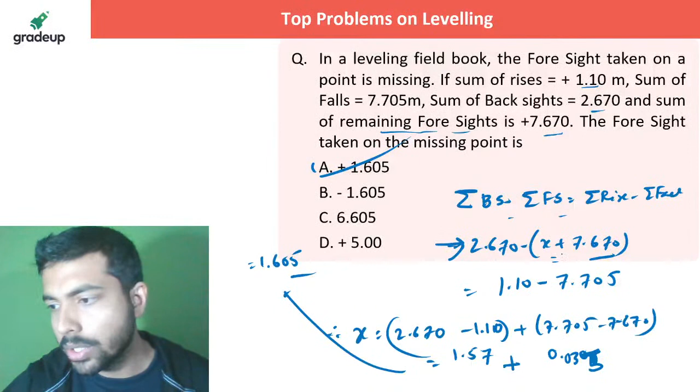It's not 0.95. It's going to be 0.035: 7.705 minus 7.670. So it's 1.57 plus 0.035, that is 1.605, the first answer. The concept is very simple. Summation backsight minus summation foresight is summation rise minus summation fall. They are saying one of the foresight readings was missing. What is that missing foresight reading? The remaining sum is 7.67, and one more is there, that is X. Let me know in the chat section. So what is the answer to this question?

An observer standing on the deck of a ship just sees the top of a lighthouse which is 40 meters above the sea level. If the height of the observer is 8 meters above the sea level, find the distance of the observer from the lighthouse in kilometers. It's a very simple question, a one mark problem. I hope everyone can do it. Quickly, let me know in the chat section what the answer is.

An observer standing on the deck of a ship just sees the top of a lighthouse which is 40 meters above the sea level. If the height of the observer is 8 meters above the sea level, find the distance. So everybody knows the actual concept. D1 is root over H1 by 0.0673, where D is in kilometers and H1 is in meters. And D2 is root over H2 by 0.0673. Many people will ask me why and how. The point is very simple.

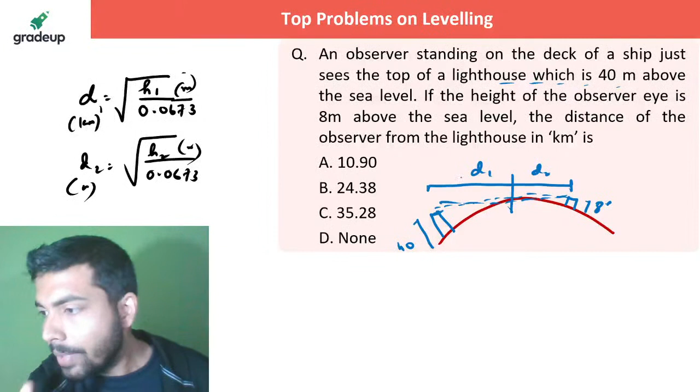The lighthouse is 40 meters above the sea level. This is the lighthouse, and the height of the observer is only 8 meters. So this is 8 meters and this is 40 meters. What is the total distance between them? That is what they are asking. This is D1, this is D2, and their sum, D1 plus D2, is the total distance between them.

If you calculate it properly, it gives a value of 3.855, if I'm not wrong, times root over H1 plus root over H2. Check once whether you are getting this value or not. 3.855, yes, and this is in kilometers. So just put the values here. It's 3.855 times root over H1, where H1 is the height of the lighthouse, 40, plus root over of 8 meters.

3.855 times root over 40 plus root over 8. So it is coming to 35 point something. One is 40 meters above, one is 8 meters above. What should the distance between them be? What do you think the distance will be? Check it and let me know in the chat section. It's coming to around 35.28, I think. Let me calculate it once. Yes, it's 35.28 kilometers. So the nearest option is C. The correct option is C. So be careful with your calculations, everybody.

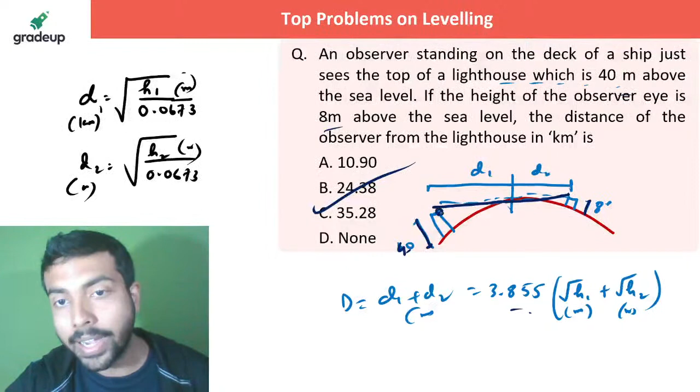An observer is standing here, and his eye level is at a height of 8 meters, and the lighthouse is at a height of 40 meters. So what should the distance between them be so that only the tip of the lighthouse is observed? It's D1 plus D2.

Next question is on your screen. This is also a very small question. I just want to touch upon all the topics of leveling, which is one of the most important topics in surveying. The following readings refer to an operation of reciprocal leveling. Stations and staff readings are both given. The difference in elevation between A and B is? It's a very simple question, I hope everybody can do it. Please let me know in the chat section what the answer is.

Right. So Krishna is answering which option? This one, C, or the other question? What are you talking about over here? This question, C. Okay, Gopal is also saying C. I think both of you are talking about this question.

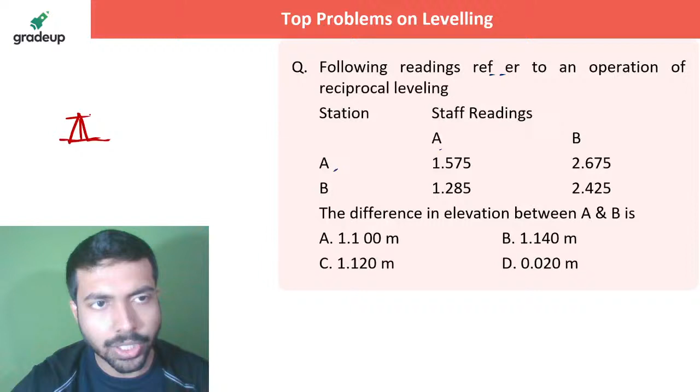So everybody knows, I think, the concept of difference in elevation between the 2 points. So reciprocal leveling, everybody knows. So this is, for example, a particular station. Near it, I am doing it. First of all, this is say another point, any particular point, I don't know about that point. So they are saying at A they are getting this, and at B they are getting this much. So it's 2.675, 1.575, right? Now in the first set of observations,

it's delta H. So from here delta H is 2.675 plus correction. Why? Because this reading is erroneous.

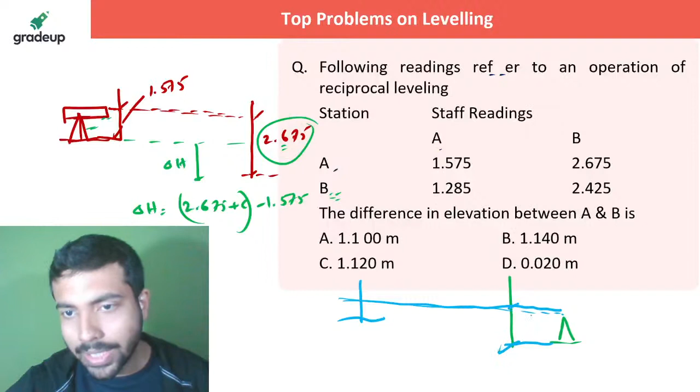So what happens in the other observations? Let's see that also. So this particular thing is happening. This reading is 2.425 and this reading is 1.285. Understand the concept, it will clear many doubts. Don't just go by the formula. Suppose I'm giving you an additional question: if RL of A is 200 meter, what is the RL of B? If you don't know which one is at a higher elevation, you can't do it. That's why always try to know the concept behind it.

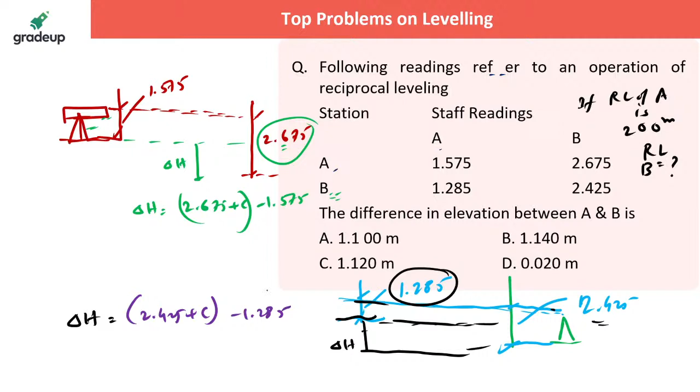Everybody knows the formula delta H is equal to half of the difference in the readings. But this is the concept: both are having a difference of delta H. So the true elevation difference delta H is equal to this erroneous reading 1.285 plus C. This reading is taken near and this reading is taken far. So it's 2.425 plus C minus 1.285. Sorry, it's not plus C there; here it will be plus C. Now you have two equations. Delta H is equal to 2.675 ... This is the combined correction due to curvature, refraction, and collimation error. Everything is included, right?

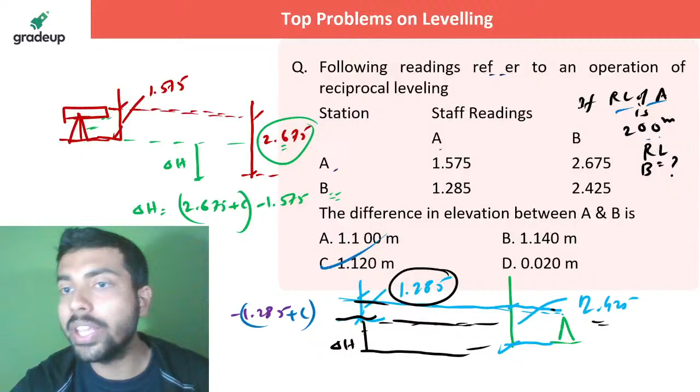But if they ask if RL of A is 200 meter, what is the RL of B? The answer can be 200 plus 1.12, or 200 minus 1.12. That is why you have to draw the figure. You have to at least know from the readings which station is above which. If RL of A is 200 meters, you see that A is above B, so RL of B must be lower. 200 minus 1.12 is 198.88 meter.

So the next question is up on your screen.

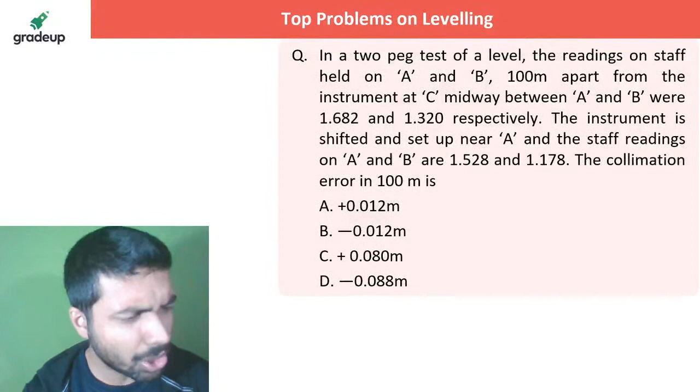In this particular question, they're asking: in a two peg test of a level, the readings on a staff held on A and B, 100 meter apart, from the instrument at C midway between A and B were 1.682 and 1.320 respectively. In a two peg, peg doesn't mean the peg you're thinking of, okay? So let me know in the chat section. What is the answer to this question? Very simple question. Once again, I hope everybody can do it.

The reading on a staff held on A and B 100 meter apart from the instrument at C midway between A and B were 1.682 and 1.320 respectively. The instrument is shifted and set up near A and the staff readings on A and B are 1.528 and 1.178 respectively. Fine. What is the collimation error in 100 meter? Quickly let me know in the chat section. Quick, as fast as possible. Collimation error is asked in 100 meter.

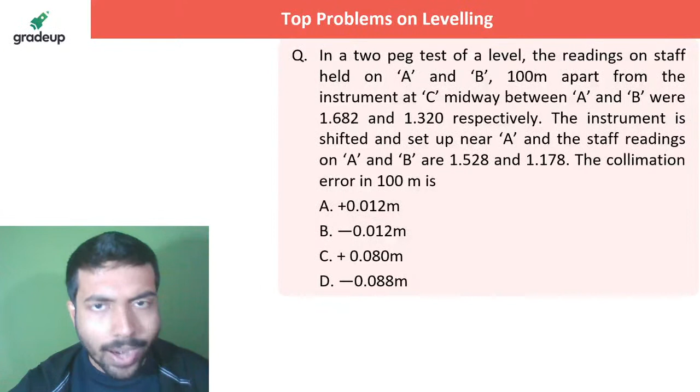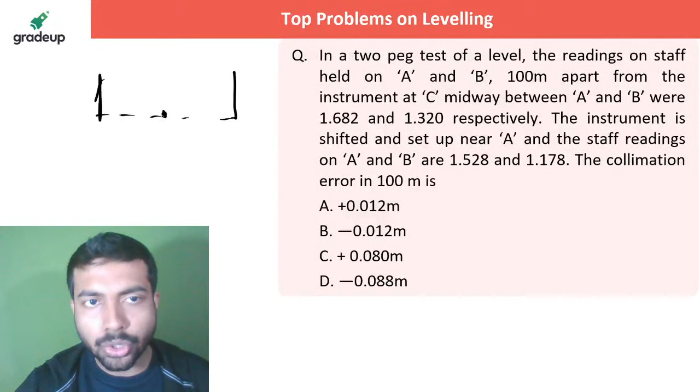Quickly. Come on, what are you doing? Quickly let me know in the chat section. What is the answer to this collimation error? How do we find collimation error, sir? Everybody knows it, yes or no? Yes sir. So what they are saying, initially two stations were there, A and B, 100 meter apart. Instrument at C midway between A and B. The instrument is here, right? So when the instrument is midway, what is the collimation error? Zero, sir.

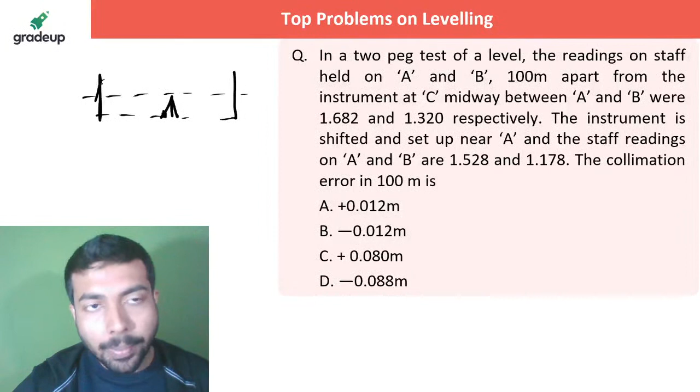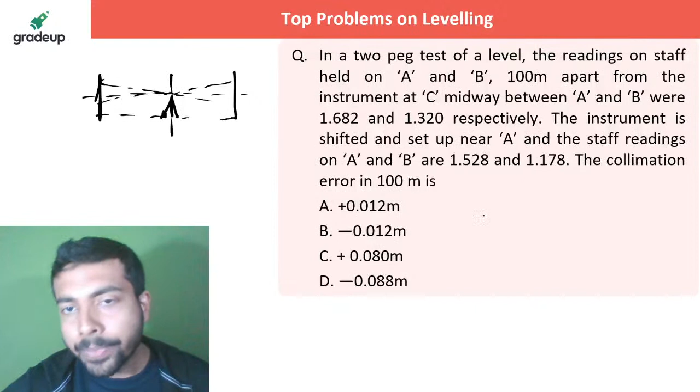When the instrument is midway between A and B, whatever collimation error happened due to A, the same collimation error happened in case of B also. I shouldn't say zero, they're equal. What is the meaning of collimation error? Collimation error means, for example, an instrument is there and its horizontal axis is not horizontal. That means the axis is going to lean downwards. You should get this value as the reading, but instead you are getting this value. This is known as collimation error.

So basically you were about to get these values as reading, and what are you getting? Negative. So in this occasion, both the collimation errors are going to be same. Krishna is saying option A. I hope he is correct. Now the instrument is shifted and set up near A. This is A, this is B. The staff readings were 1.682, so the actual reading should have been 1.682 plus C. And here it should have been 1.320 plus C. That's how it should have been, right?

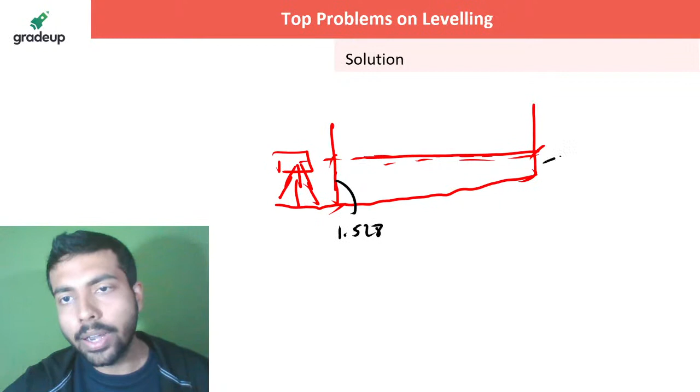The instrument shifted and set up near A. Now it has shifted near to A, and I'm getting readings of 1.528 and 1.178. So in this occasion, tell me what is the collimation error going to be? How much collimation error will there be here? Anybody in the live chat section? But error is coming 0.006.

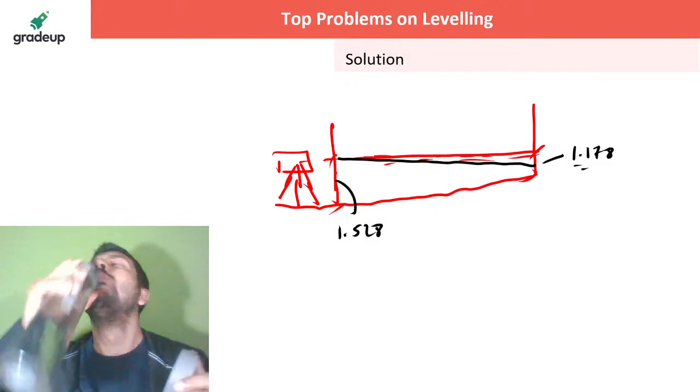Wait, wait. Understand one point. I can see many people are just escaping from the session. Oh, the problem is tough. That is a common thing that you do, without understanding a single word. Just be focused. Every problem is not just formula based.

So here, what will be the collimation error? That will be 2C. Why? Because if in the first case the collimation error is C, in this case it is going to be 2C. When the instrument was at the midpoint, the collimation error was coming due to 50 meter, 50 meter. Now the collimation error is coming due to 100 meter. So of course the error is going to be 2C.

It's as simple as that, right? Suppose I am saying that this is theta. Okay, this is the collimation error. This is say L. What is this value? आप क्या बोलोगे? This is L tan theta. tan theta is equal to x by L, so x is equal to L tan theta.

Fine. Now suppose I'm increasing the distance to 2L. Now on that occasion, what will be this value? It's 2L tan theta. Simple सी बात है. Right? So the error is going to be double in this case.

Understanding the concept, please let me know in the chat section. सबको समझ में आ रहा है हाँ या ना quickly बोलोगे एक बार. Let me know in the chat section whether you people are getting it, yes or no.

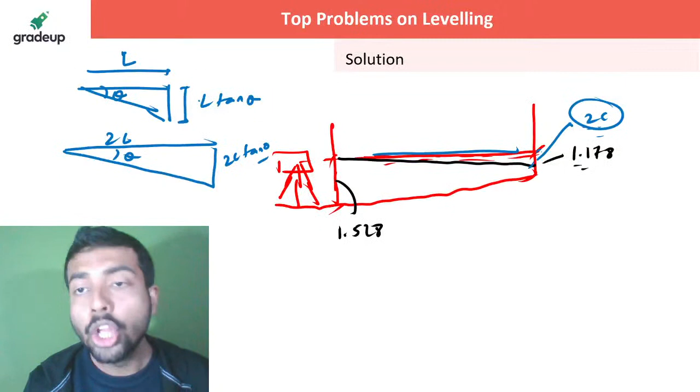Clear? So how do you actually find it? I am just letting you know a particular formula. So it's collimation error. Whatever you are going to get, that is your half of simply 1.528 minus 1.178, 1.682. Yes, sir, 0.006 is coming. Yeah, you have to do the double of that. 1.682 minus 1...

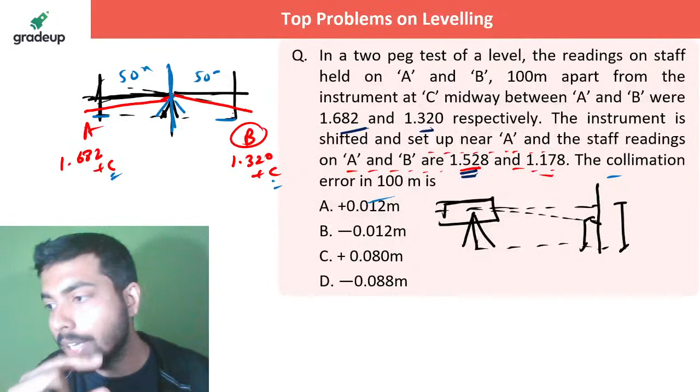What is coming over here is that they are asking what the collimation error means. Actually the 2C case they are asking in this occasion. So collimation error: if I ask what is the true difference of height between A and B, you will tell me 1.682 plus C minus 1.320 plus C. Fine, this is the actual height difference.

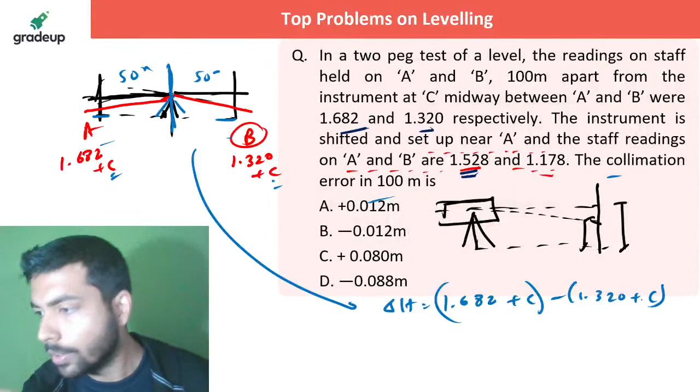Okay, in this occasion, what is the difference in height? It is 1.528 minus 1.178 plus 2C. Now both are equal. Height का जो difference है वो दोनों ही बराबर है एक दूसरे का. So from here, it's very simple.

Understand. Delta H is the difference in height between the two levels A and B. These are the same. Wherever you place the instrument doesn't matter. The difference between A and B is going to be the same. Either you keep it midway or near A and measure near B, doesn't matter at all, right?

So this delta H you are equating to 1.682 minus 1.320 plus C, and that is also the same as 1.528 minus 1.178 plus 2C. So what is the answer? C is half of 1.682 minus 1.320 minus 1.528 minus 1.178. I hope everybody is understanding the question. Please let me know in the chat section what value is coming.

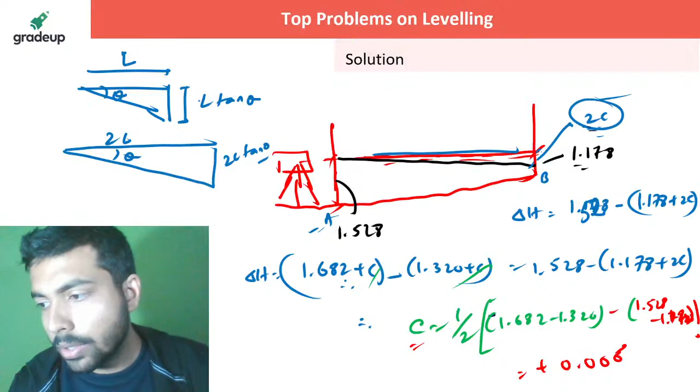1.682 minus 1.32, minus 1.528 minus 1.178, right? The answer is coming 0.012 by 2, so you are saying it's 0.006. The answer is coming as 0.006. Fine, not a big deal. Yes, okay. So it's 0.006 meter.

Now you will ask me, sir, is the answer 0.006 meter? But they are asking the collimation error in 100 meter. You are finding C. C is the collimation error in 50 meter, not in 100 meter. 2C is the collimation error in 100 meter, and that's why the answer is 0.006 into 2, that is 0.012 meter, and option A is correct. Understanding what I'm trying to say? समझ में आ रहा है मैं क्या बोलने की कोशिश कर रहा हूँ?

They are asking the collimation error in 100 meter. That means they are asking for 2C, not C. You are calculating C, the collimation error in 50 meter, that means L tan theta. I want 2L tan theta. So that's why into 2, and the answer is plus 0.012. Clear concept, everybody? I think it's clear. Fine.

Next question is up on your screen. Hello, Varsha. Good evening. RL of the floor of the building is 174.4 meters. Staff reading on the floor is 1.725 meter.

I hope all of you have understood the question and all of you have enjoyed the question. Those people who are there actually, I have seen already the live count has decreased a lot just because the problem is a little bit conceptual. थोड़ा समझने वाली बात है. तो obvious बात है कि आधा से ज्यादा लोग भाग जाएंगे because इसमें समझने वाली कोई चीज है इसलिए. तो that's a general trend. I am okay. No need to take.

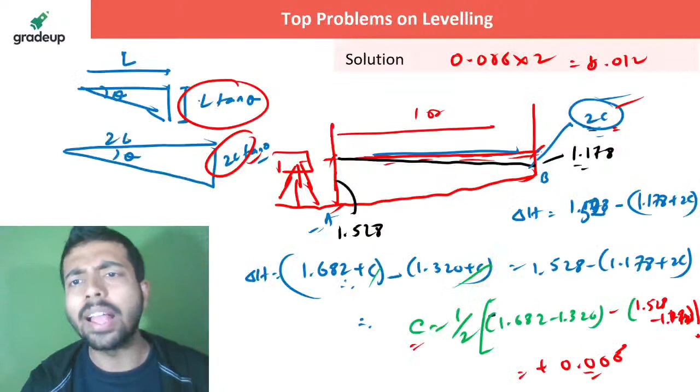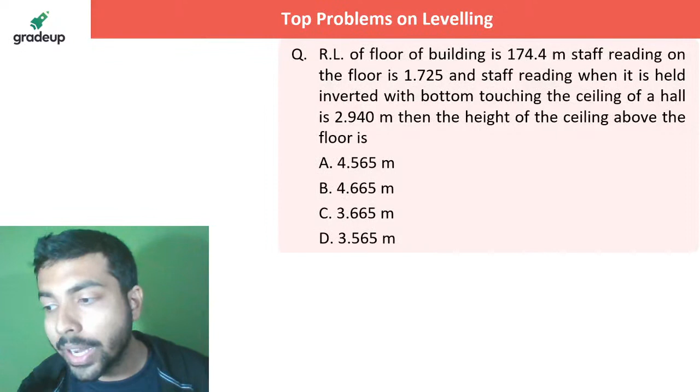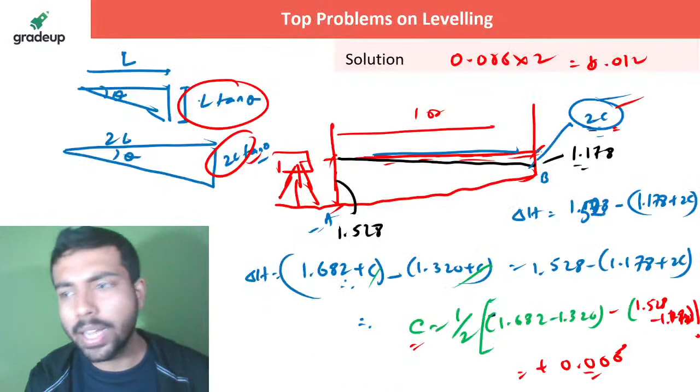So in previous question, delta H was total error ना? Delta H was total error मतलब समझ में नहीं आया. Delta H is the difference in height. Delta H कोई error नहीं है. Delta H is the difference in height of the 2 points. This is one point. This is the another point. I am keeping the staff over here, for example. This is a measurement, Y1 I am taking, and this is a measurement, say Y2 I am taking. The difference in elevation of the 2 points is delta H.

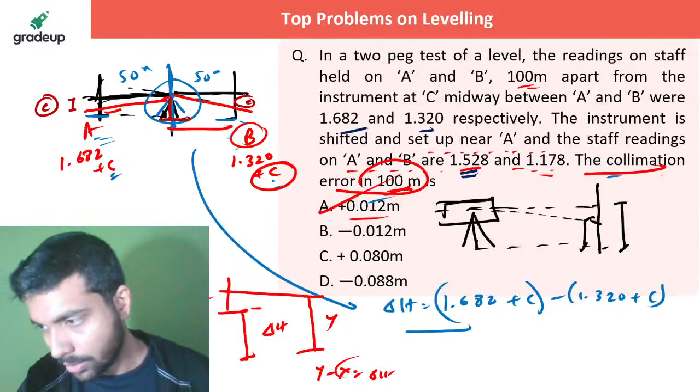So when the instrument was midway, अगर इंस्ट्रूमेंट जो कि था यहाँ पे when it was put midway, बीच में था. So when the instrument is midway, what was happening is that this is the correction C. यहाँ पे भी correction C ही होगा ना? Everyone getting my point? Fine. So I hope all the doubts are cleared. I think I have answered 3 questions from 3 people.

So what they're saying, RL of floor of a building is 174.4 meters. Staff reading on the floor is 1.725, means basically the backside reading 1.725. The RL of this point is 174.4. After that, staff reading when it is held inverted with bottom touching the ceiling of a hall. This is the way. So it's 2.940 meter. What they're asking is what is the height? The height you can see from the figure. It's very simple. 1.725.

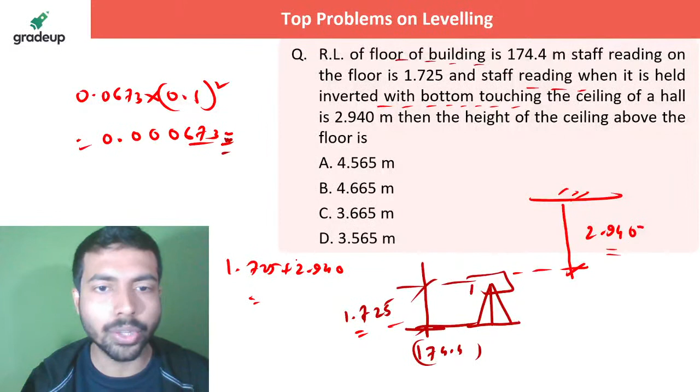ये तो होता है ना सर? कौन सा चीज होता है? हाँ जी, ये फिगर देख लो. From the figure it is evident. 1.725 plus 2.940. So whatever be the answer, let me know in the chat section. 4.665 I guess is the correct answer, right? Everybody understanding what I'm trying to say? Let me know in the chat section whether you people are able to understand it. Whether the answer is 4.665 आ रहा है ना? चेक कर लो एक बार. Do check it, please.

This is coming, right? Fine. Next question is up on your screen. Let me know in the chat section, sir, what is the answer to this question.

It's 1.725. Inverted staff reading is this, 2.940. So they are asking me what is the height between the floor and the ceiling. What is it? 1.725 plus 2.940. Such a simple question. Fine.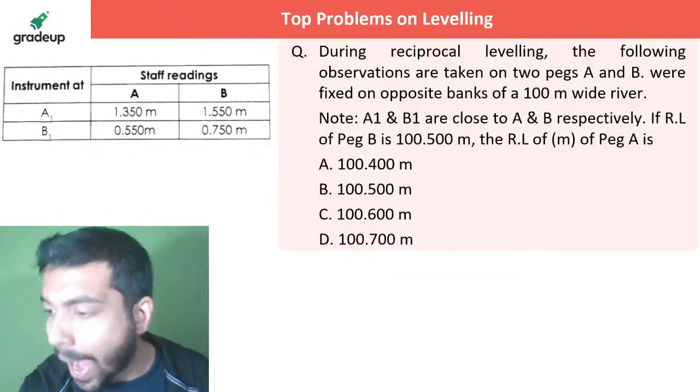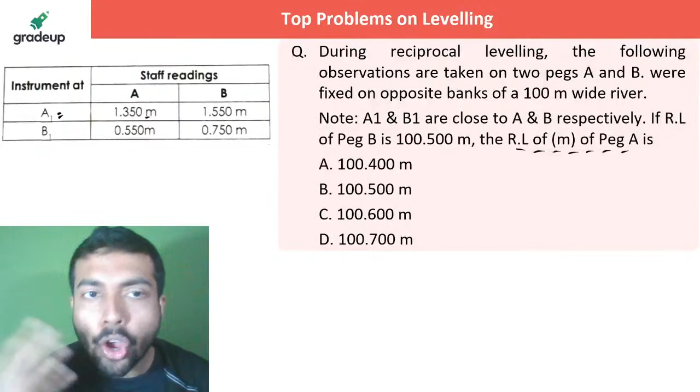So let me know in the chat section what is the answer to this question. So when instrument is at A1, right, then this is the staff reading. So what they are saying is that the RL of peg A is. So first thing is that you have to judge which peg is at the top, peg A or peg B. So instrument at A1, A1 is a point close to A, right? So what they are doing is that when I am at A1, okay, I am just doing it. It's 1.350.

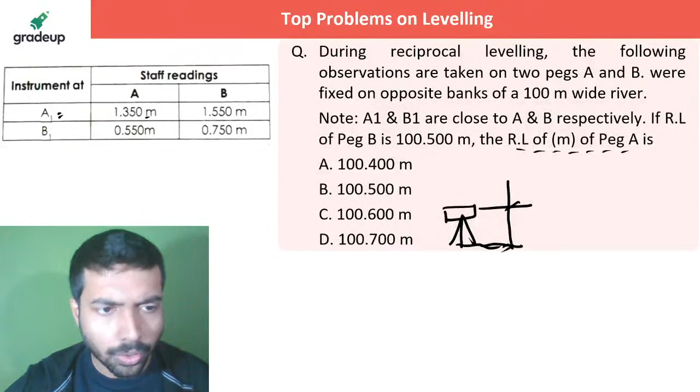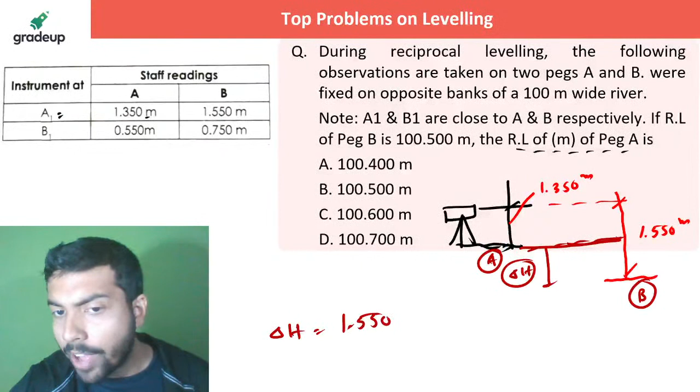Okay, and this is your 1.550 meter. Okay, fine. So where is the possibility of error, sir? Where is the possibility of error? Here. Okay, so this reading needs a correction. Those people who are unable to find out what was happening, this is for example the true difference in these 2 points A and B. This is A, this is B, right? So what can I write as delta H? Delta H I will write 1.550 plus C minus 1.350. Why plus C? Because this is a far away point where errors are subject to come. But this is a near point, so any error, the opportunity, the probability of any collimation error is negligible.

Fine. Next, when I am putting the instrument near B, what is the thing happening, sir? Near B, when I am putting, okay, so what is happening is that I am getting a value of 0.750 meter, okay, and instrument at A, if when I'm calculating basically instrument at A, then I am getting actually a reading of 0.550 meter. So what is the difference in RL in this case, sir? In this case, it will be delta H, 0.750 minus 0.550 plus C.

For this reading you need correction. You require correction. Why? Because this reading is now far away. That's why. Fine, okay. So now you have got two equations of delta H. One is your from the first observation, that is this one.

If you do it in this fashion, any question, whatever they're asking, is there any solving mechanism, any program like this?

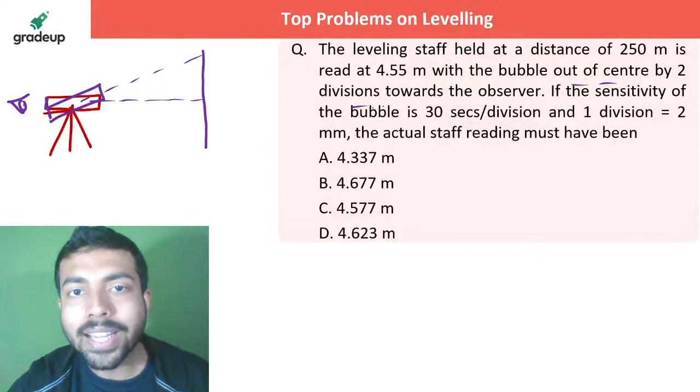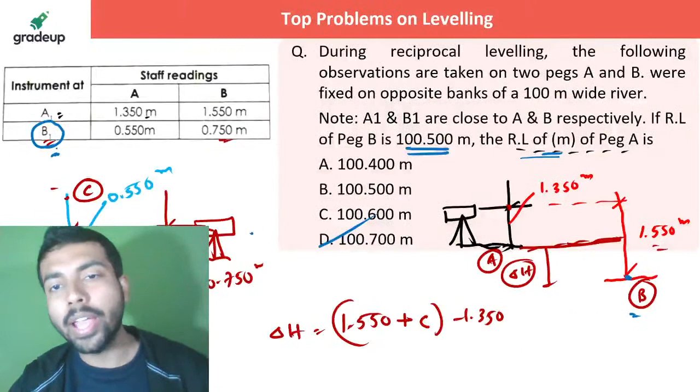Every calculation is done over here, please watch it and see it.

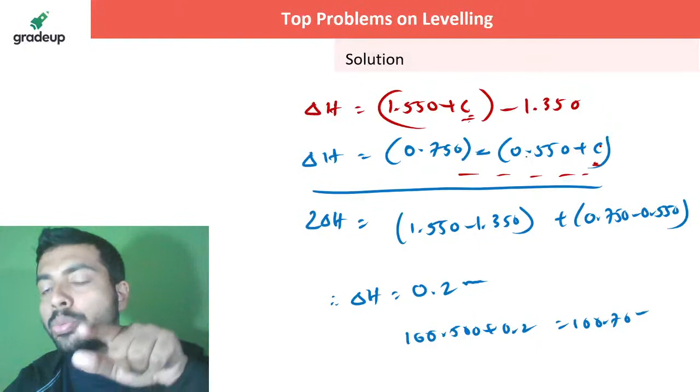So sensitivity of the bubble tube has two equations. Everybody knows it, let me know in the chat section sir, what is the meaning of sensitivity of the bubble tube?

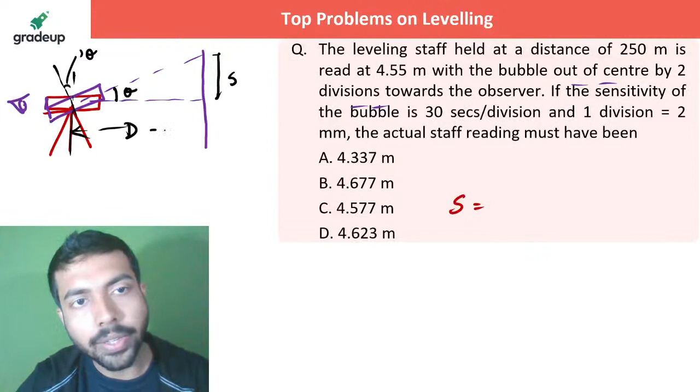So one definition is this is say theta. If this is theta, this is S, this is D. So tan theta is equal to S by D. Does that work, am I getting through? Everybody, I am getting right, S by D. So I know that if theta is small, theta is equal to S by D almost, in terms of radian. Tan theta is very small, then theta is S by D. Next, this is from the geometry.

This is a level tube, and this level tube is inclined. Now you are going to say in which direction it is inclined. It can be inclined in positive this way, and also negative this way.

So they are saying the actual staff reading should have been what. They are saying that when the bubble is out of center by two divisions towards the observer, so this is actually the point. So its reading would be like this actually.

Towards the observer means it is going to be like this. Because towards the observer this shift has happened, it will shift in the backward direction.

This is for example a bubble tube. The bubble tube is like this, right? This is a bubble tube, and here markings are present. Markings are like this, understand the point, these are the markings. Now what is happening is, this is the bubble, for example. The bubble actually stays at the center.

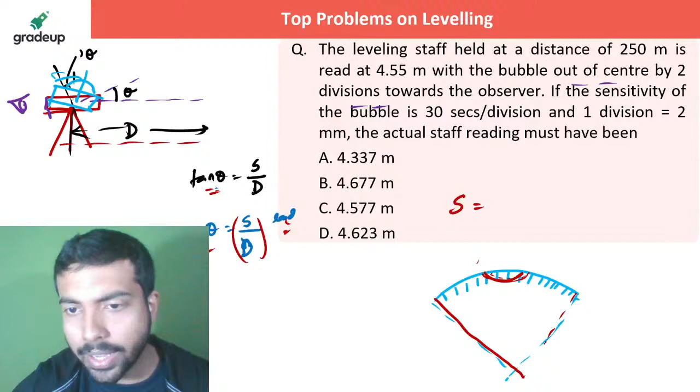Now, this particular angle is also theta. Here some angle was there. I am shifting this particular thing towards the front. Understand the question, it's a very nice question again.

So if I do it like this, the bubble will shift towards the observer. If I do it like this, the bubble will go away from the observer. So here they are saying that the bubble is shifting towards the observer. So if the bubble is shifting towards the observer, actually the actual reading I am measuring...

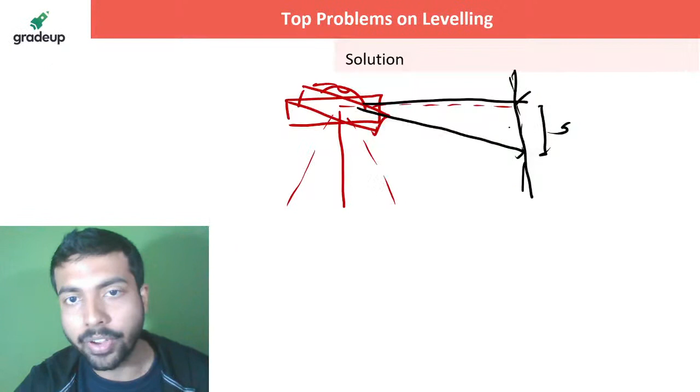...is this, and the actual reading I should have measured is this one. Actual staff reading would have been this one, but I am actually measuring this particular value. This is the measured value, and this is the true value. So you can see from the figure that measured value plus this S will be the true value.

So theta is equal to S by D. No problem. Now, what do you mean by the term sensitivity? Sensitivity means to cause unit shift.

How much angle do I need to rotate to cause the division, unit division shift? So when I am doing it by theta angle, it is shifting by theta angle. So it has gone out of the center by two divisions. When this much angle is there, what is happening? The bubble tube has gone out of the center by two divisions.

So sensitivity means that to cause unit shift, unit division shift, what is the angle that needs to be rotated? That is known as sensitivity. So basically, sensitivity is actually S by ND. This is known as sensitivity.

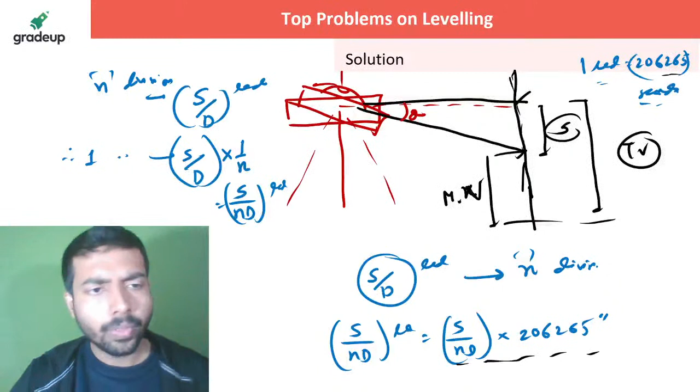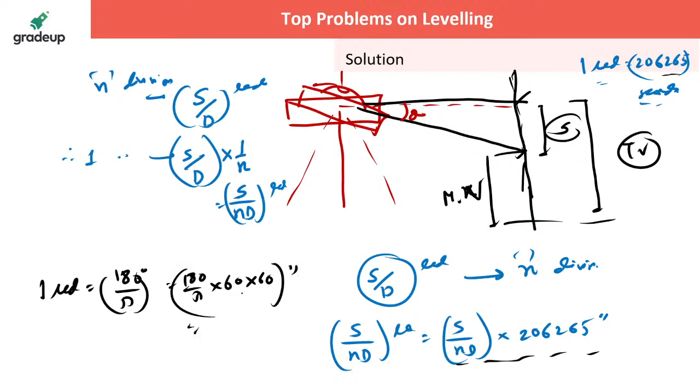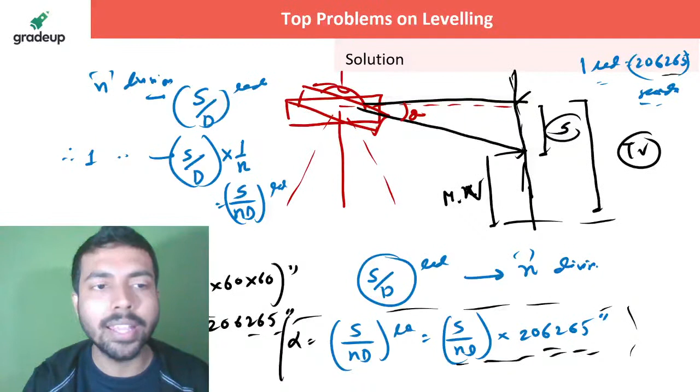That means 180 degrees by pi, that is 180 by pi into 60 into 60 seconds, because 1 degree is 60 minutes, 1 minute is 60 seconds. If you do it, it will come near to 206,265. So this is the sensitivity. Now the sensitivity is already given to you in the question, that is 30 seconds. So if it is already given to you, just put the value.

30 seconds is equal to S by ND into 206265 seconds. N means the number of divisions by which it has shifted. D is the distance, 250 meter. So this S will come directly in meter. It's 30 into 2 into 250 by 206265.

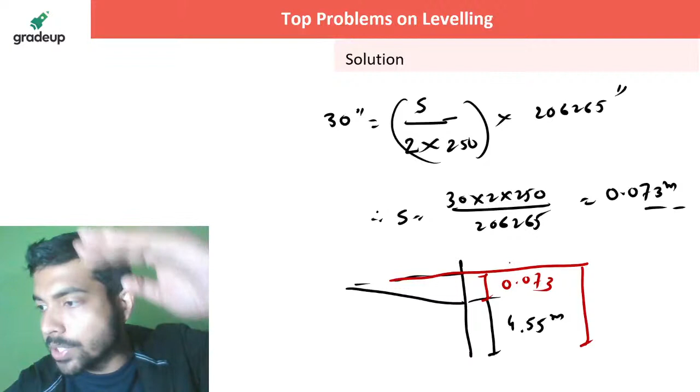4.55 meter is the reading you are measuring. The reading that you should measure is 4.55 plus 0.073. So actually, the answer should be 4.623 meter. Got the concept, everybody? This type of problem is likely to come.

Okay, the point is actually this. Don't expect that every problem will be just tick mark type. It was IIT Bombay setting up the question. Not every problem is like 'tell me the difference in height.' So you have to go inside the concepts, and that is what is mainly important for the questions. So this type of problem we have done.

It's a very simple question. You just have to know the concept. Do you know the concept? Summation of backsight minus summation of foresight.

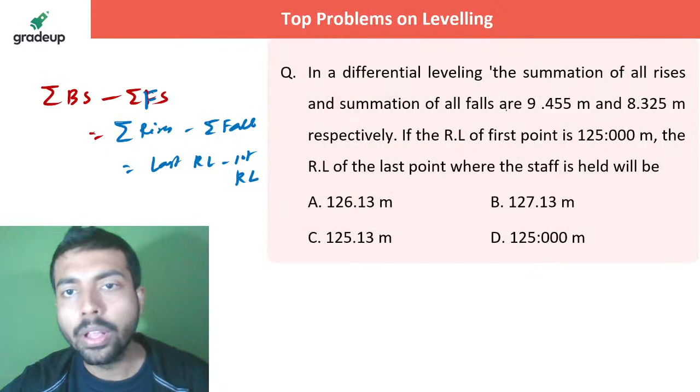Summation of rises minus summation of falls is equal to last RL minus first RL. So they have given you summation of rises 9.455 minus summation of falls 8.325. That is equal to last RL minus first RL. The last RL is not given; the first point is given, 125. So what is the last RL?

It's 125 plus 9.455 minus 8.325. Just do it and let me know. So the answer is coming as 126.13 meter. I hope everyone got it. Moving on to the next question.

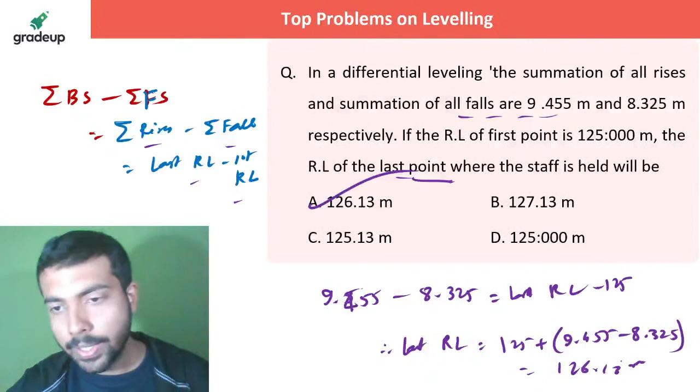The distance between two benchmarks is 1000 meter. If during leveling the total error due to collimation, curvature and refraction is found to be 0.120 meter, then the magnitude of the collimation error is?

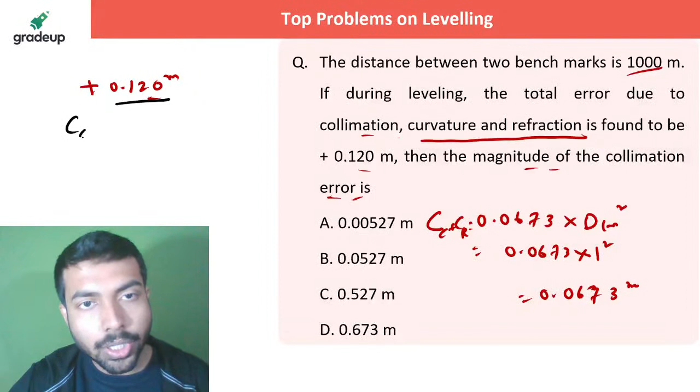0.0673 meter, right? Revision. Yes, so it's 0.120 meter. This is the total correction, so it's collimation plus curvature plus refraction. Okay, so the total error is 0.120.

Out of that, this is your 0.0673, if I'm talking about magnitude. So the collimation correction, the error is actually 0.120 minus 0.0673, which is 0.0527 meter. I hope this is going to be the answer, right?

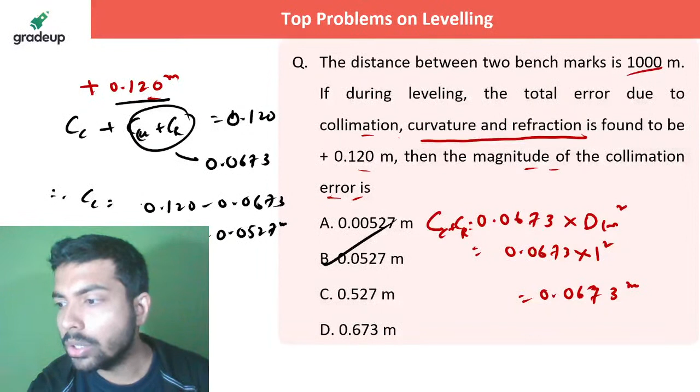For example, in general, if 80 marks is required, for example, I'm telling you, on that occasion that will be around 70 to 72 for OBC.

Okay. So let me know in the chat section what they are asking: the sensitiveness of a level tube decreases if. Let me know in the chat section.

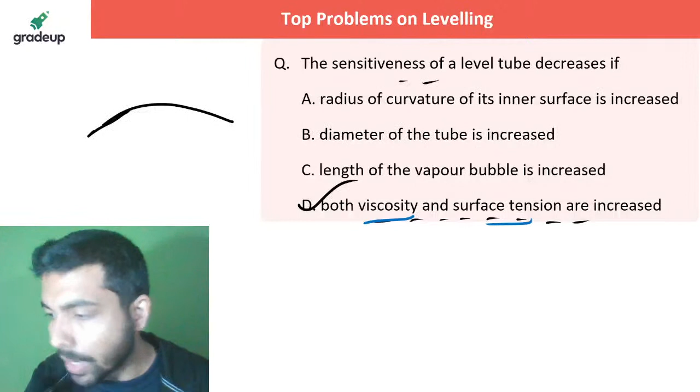If viscosity of a fluid is increased, then it is going to offer more friction. तो वो आगे नहीं जाएगा. So if it is not very agile in the movement, it is not sensitive. Sensitive means that it is very frequently showing you the change. So if viscosity and surface tension both are increased, the movement of the liquid inside the bubble is not very fluid, right?

Okay, next question is up on your screen. There's one more question on this bubble tube. If the staff intercept on a staff located at 100 meter from the level for 5 division deviation of the bubble is 0.05 meter, and if the length of one division of the bubble is 2 mm, then the radius of curvature of the bubble tube is, yeah, here your question comes.

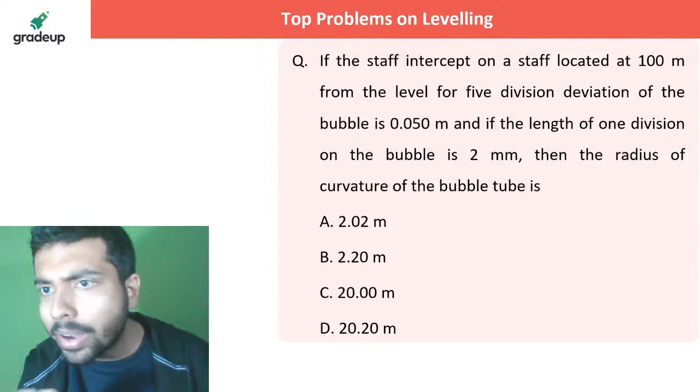Yes, of course. So let me know in the chat section, what is the answer to this question? If the staff intercept on a staff located at 100 meter from the level for 5 division deviation of the bubble is 0.05 meter, the length of one division. Someone was asking what is the use of that per division. On this occasion, this is going to be useful for you. How?

For example, this is the angle theta. Initially, the bubble was here. Now it shifted and went here due to the theta movement. For example, it has shifted n divisions in total. So how much total path has it traveled? nL. Understanding? So if the radius of the bubble tube is R, can I write nL by R is theta, right? And what is theta?

So 5 division bubble. So everything is given to you over here. At a staff located 100 meter from the level. And from the earlier question, you have found that theta is equal to S by D. If this is S, this is D, then this is theta. Of course, theta is equal to S by D. Just equate these two to get the answer, right?

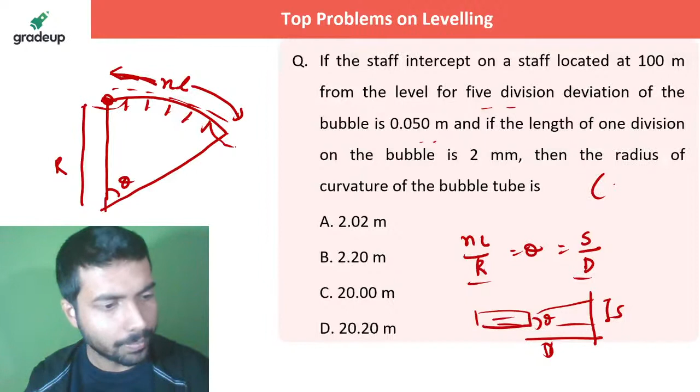So I hope you are going to get the answer and let me know in the chat section whatever answer is coming. If it is coming C, so it's fine, C. I don't have any problem. From this equation you will be able to calculate. If it's coming C, then it's correct. You're saying C, so it's C. I have told you the concept. This is the concept. Fine.

Okay. So this is the homework for today. Let me know in the comment section. You people don't do homework at all. So let me know in the comment section what is the homework for this. Take the screenshot. That is, length of one division is L. 3, 2, 1. Boom.

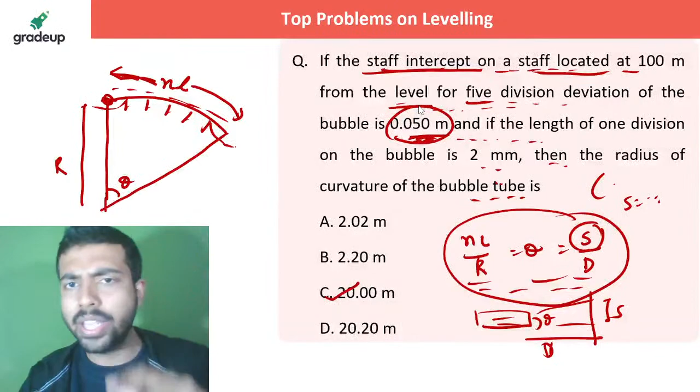Staff intercept given is 0.05. Is the staff intercept given? Oh yes, it is given. If the staff intercept on a staff from the level is given 0.05, this is given. Who is saying it is not given? It is given, 0.05. If the staff intercept on a staff located at this for 5 division is 0.050. It is given 0.05. Okay, fine. So the problem will be solved then.